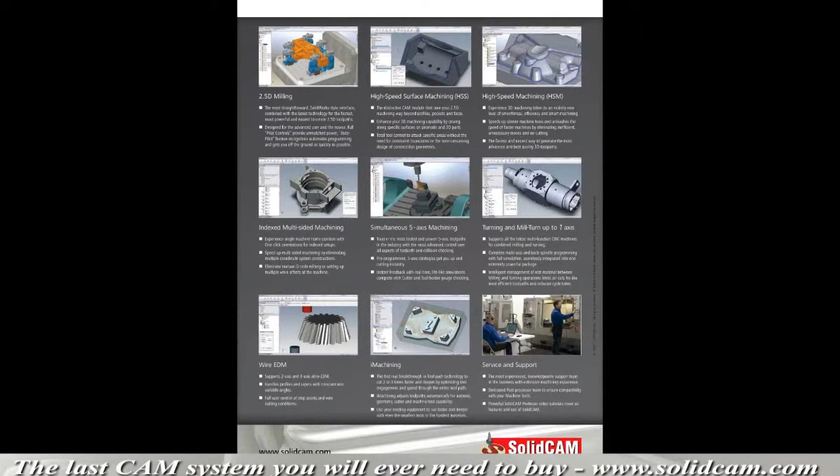SolidCAM has the packages to go right alongside your business. Add a new machine, SolidCAM will program it. Need to cut in more axes, SolidCAM can do it. You simply won't outgrow SolidCAM. It will be the last CAM package you'll ever need to buy. Now let's briefly look at the packages in more detail.

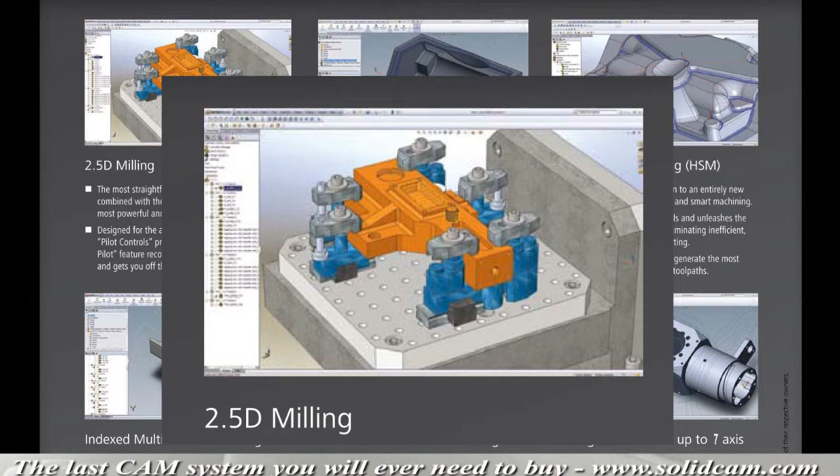2.5D milling. SolidCAM has the most straightforward SolidWorks style interface combined with the latest technology for the fastest, most powerful, and easiest to create 2.5D toolpaths. SolidCAM was designed for the advanced user and the novice. There are full pilot controls that provide unmatched power, and even autopilot feature recognition that automates the programming and gets you off the ground as quickly as possible.

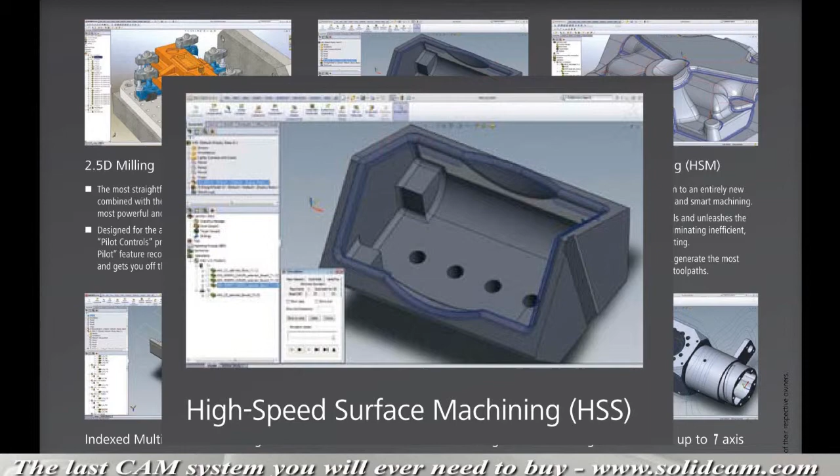HSS high-speed surface machining. This distinctive CAM module takes your 2.5D machining way beyond profiles, pockets, and faces. It enhances your 3D machining capability by driving along specific surfaces on prismatic and 3D parts, with total tool control to attack specific areas without the need for constraint boundaries or the time-consuming design of construction geometries. Perfect for doing undercuts and using shaped tools.

HSM high-speed machining, the new level in 3D milling. Experience 3D machining taken to an entirely new level of smoothness, efficiency, and smart machining. HSM speeds up slower machine tools and unleashes the speed of faster machines by eliminating inefficient, unnecessary moves and air cutting. This is the fastest and easiest way to generate the most advanced and best quality 3D toolpaths in the business.

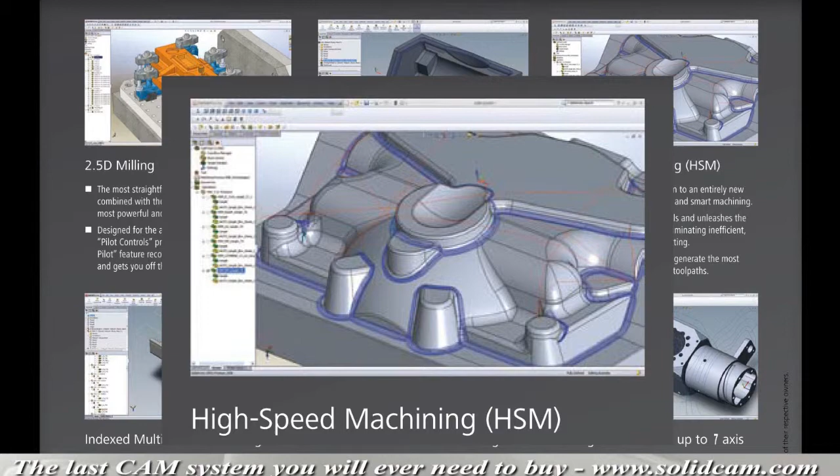Indexed multi-sided machining. Experience single machine home position with one-click orientation for index setups. Speed up multi-sided machining by eliminating multiple coordinate system constructions, and eliminate manual G-code editing or setting up multiple work offsets at the machine.

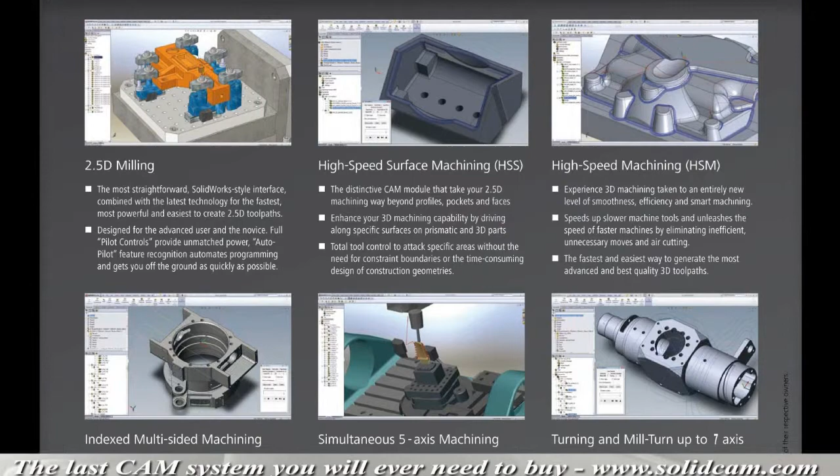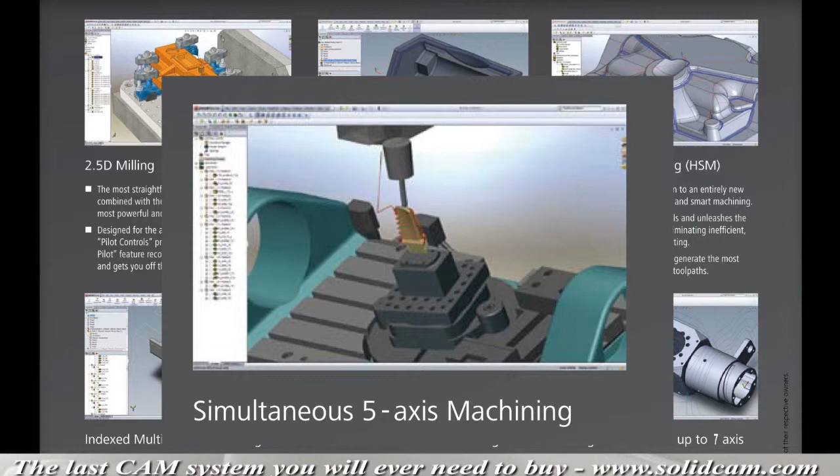Simultaneous 5-axis machining. Trust in the most tested and proven 5-axis toolpaths in the industry with the most advanced control over all aspects of toolpath and collision checking, complete with pre-programmed 5-axis strategies to get you up and cutting instantly. The 5-axis package provides instant feedback with real-time, lifelike simulations, complete with cutter and tool holder gouge checking.

Turning and mill turn up to 7-axis. Providing an outstanding solution to the hottest growing segment in the machining market, our turning and mill turn package supports all the latest multifunction CNC machines for combined milling and turning.

We have complete multi-axis and back spindle programming with full simulation, seamlessly integrated into one extremely powerful package. SolidCAM features intelligent management of rest material between milling and turning operation that limits air cuts for the most efficient tool paths and reduced cycle times.

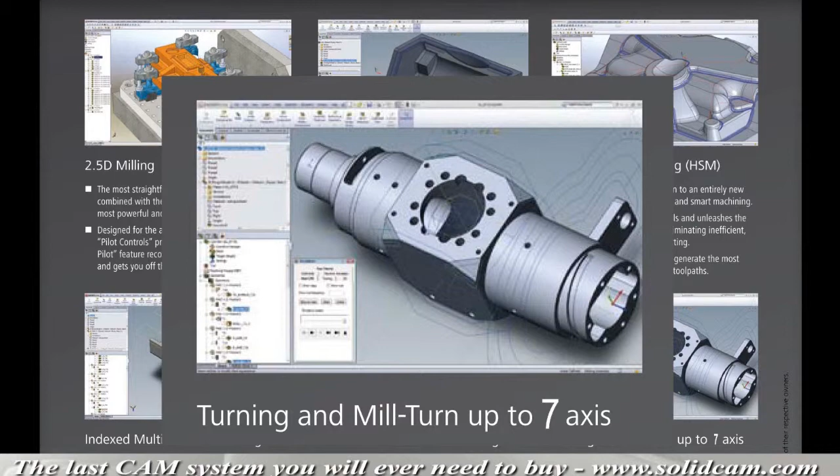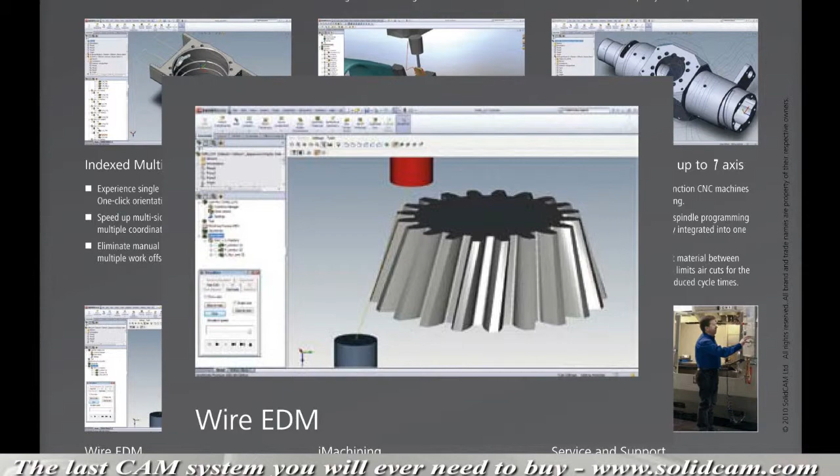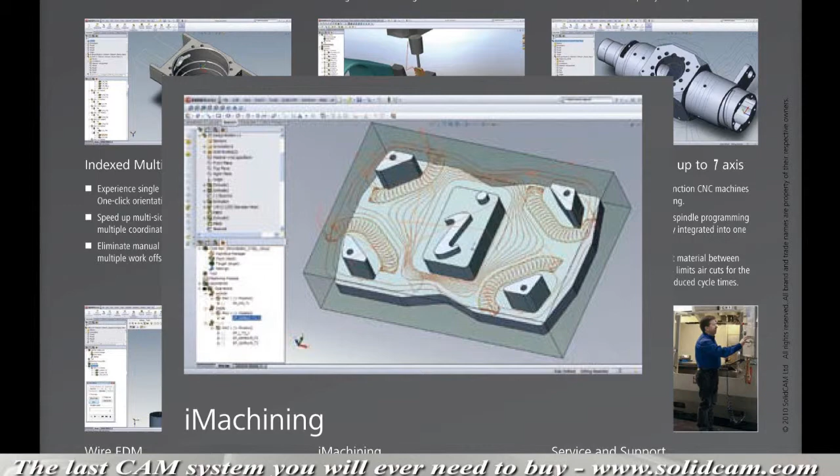iMachining. The first real breakthrough in toolpath technology that cuts 2 to 3 times faster and deeper by optimizing tool engagement and speed through the entire toolpath. iMachining adjusts toolpaths automatically for material geometry, cutter, and machine tool capability. Use your existing equipment to run faster and deeper with even the smallest tools in the hardest materials. Unlike other systems that leave you guessing at speeds and feeds, iMachining even has a speeds and feeds wizard with 50 years of machining intelligence that speeds you through the entire iMachining process.

SolidCAM has achieved the coveted Certified Gold Partner Product Certification. Unlike other CAM systems that just sort of work with SolidWorks files, we've been a Gold Partner for nearly 10 years, which is the highest level of integration possible. We were one of the first ever CAM partners with SolidWorks. You simply won't find a deeper or higher level integration than SolidCAM for SolidWorks.

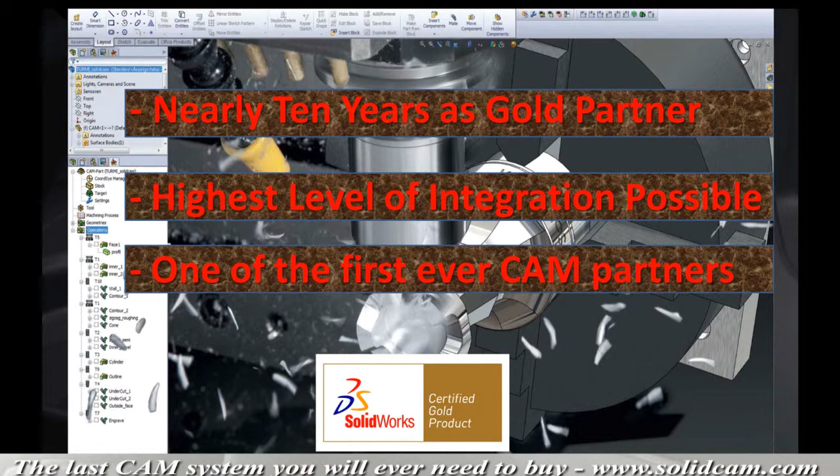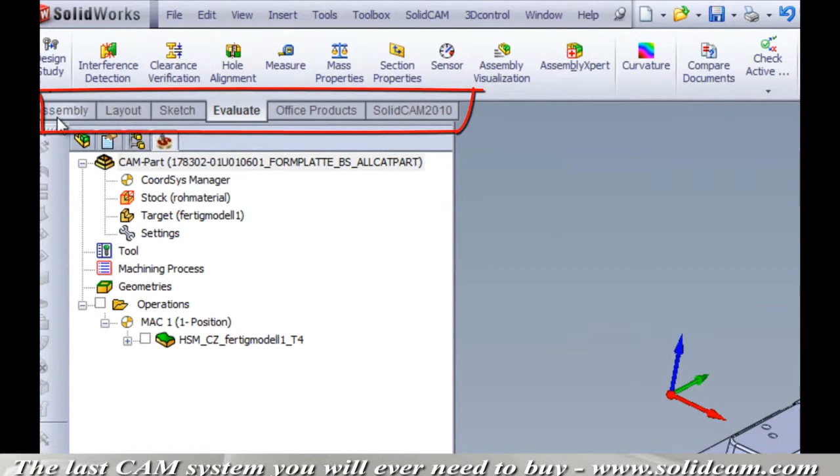One of the features that our customers say they like the most is our SolidWorks look and feel of our user interface. By running right inside SolidWorks, you can see the SolidCAM menu. It feels just like SolidWorks, so you're never having to use an unfamiliar user interface to do your CAM. We've even created a CAM toolbar to be at your fingertips so that you don't have to go far for your CAM function. Now, of course, your standard feature tree is still going to work for SolidWorks.

We've just incorporated our CAM manager into a very feature tree-like function. If you like, you can even use the two side by side so that you have your CAM functions as well as your traditional CAD functions at your fingertips.

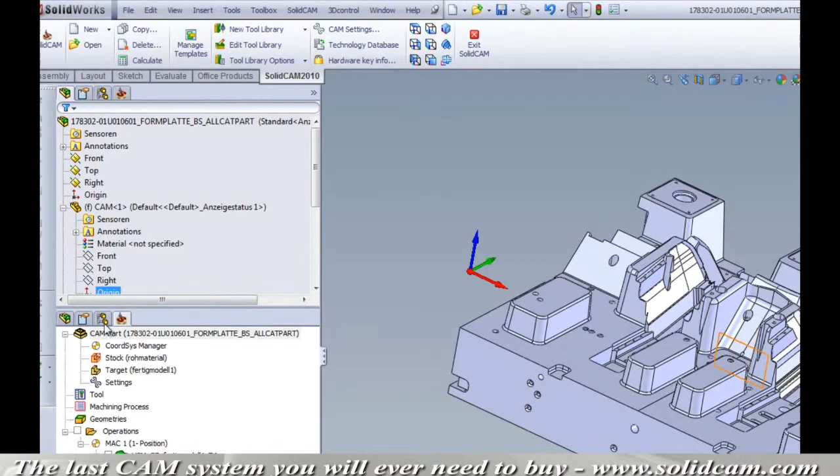Moving to our SolidWorks help menu, you'll see the SolidCAM help menu is in exactly the same place as SolidWorks help, with help topics, getting started guides, videos, and everything you need to get up to speed as quickly as possible in SolidCAM.

Here we're going to show you one of the strongest features in SolidCAM. When you have a program part, as you see here, the pockets are already set with toolpaths and the holes are as well. The system will automatically update those toolpaths when changes are made to the design model.

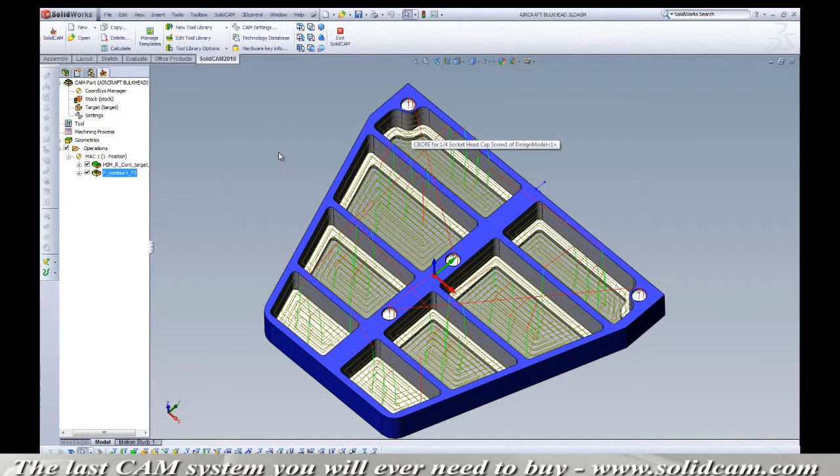Here, we're stretching a part which will obsolete every single toolpath for the pockets as well as the holes. We're going to show you now the existing toolpaths and how they're going to be completely out of sequence with the actual part.

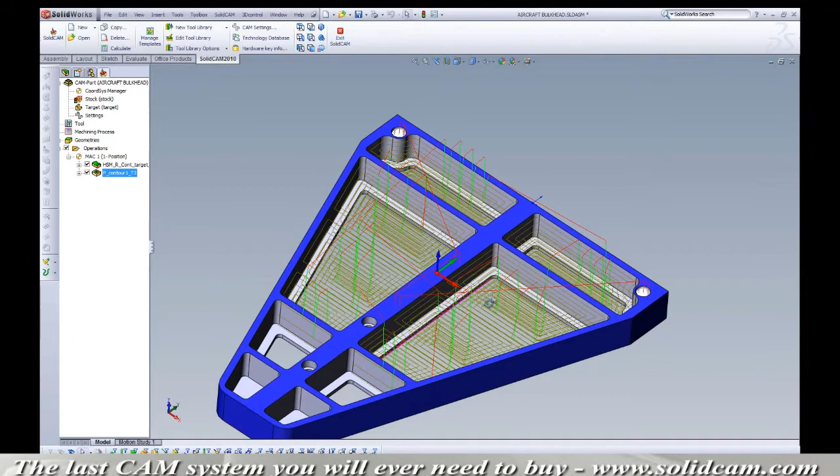Now we're going to go ahead and go on to our CAM Manager. We're going to synchronize the part to update those toolpaths. We're going to let the program automatically regenerate those toolpaths.

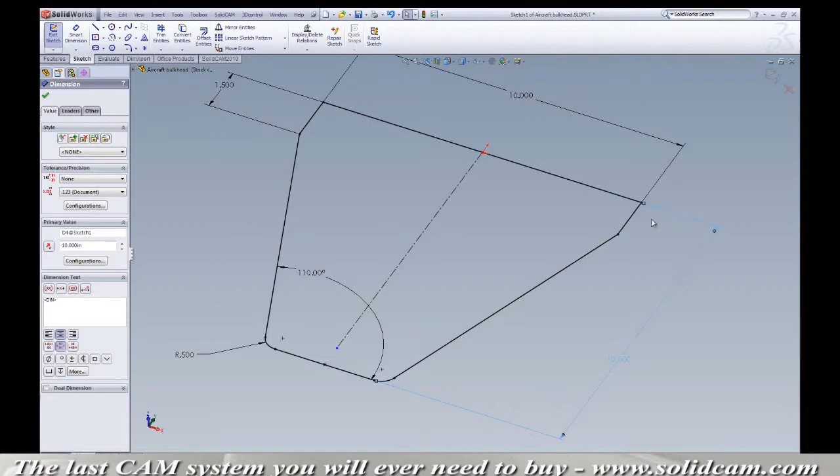So what about parts that were edited by someone outside of the CAM team? Say a design department person calls up a file like this and makes the same changes just like we did before. They stretch that part, and it has every single toolpath completely out of sequence with that part. SolidCAM is smart enough to know when that part has been changed, and when you open it the next time, it will tell you that it has been changed, even across a network, so you can choose whether or not to have that part update.

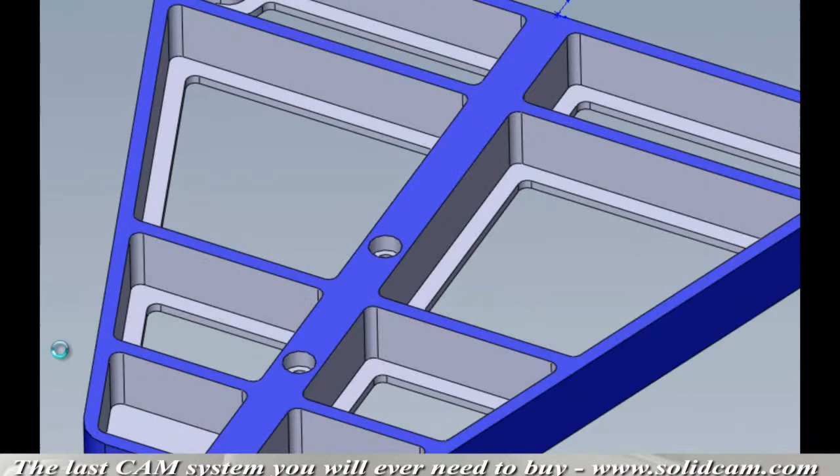Once that part is in, all you have to do is resynchronize as before, and those toolpaths will update.

Another feature that you will never get with a standalone system that is not integrated in SolidWorks is the ability to use your SolidWorks sketches to actually define your geometry.

Here, we're going to define our geometry directly from the SolidWorks feature tree by picking the sketch. Imagine if you had hundreds of pockets in that sketch. You can pick the sketch instead of spending an enormous amount of time trying to pick those pockets directly from the screen one by one. So here we show that all the chains have been formed directly from the sketch.

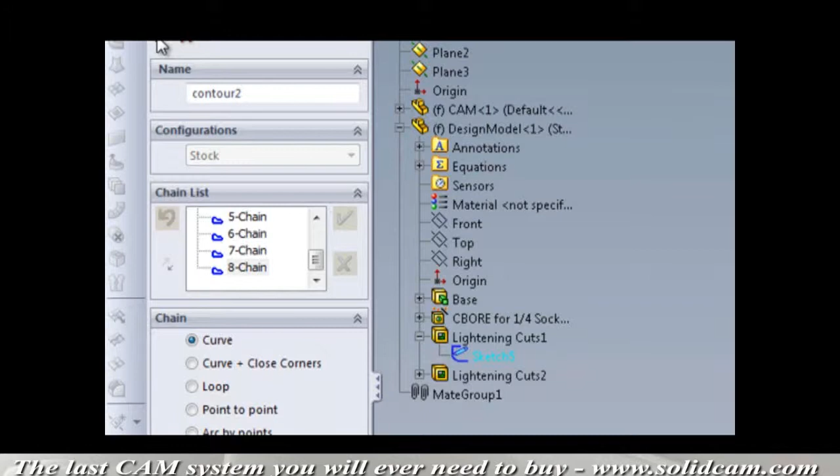At this point, we'll show you a simulation of the toolpaths. And we'll show you another simulation that goes beyond just a simple toolpath to a solid model simulation, where you can actually see the cuts in the stock.

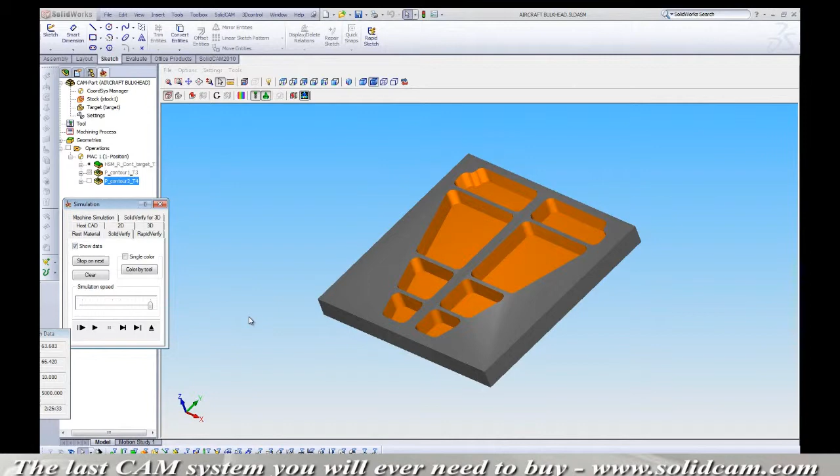Now those roughing cuts were made with a fairly large tool, which leaves the radiuses unfinished. We can use the rest material machining function to automatically go back in, use a smaller tool, and just get the material that has been left behind.

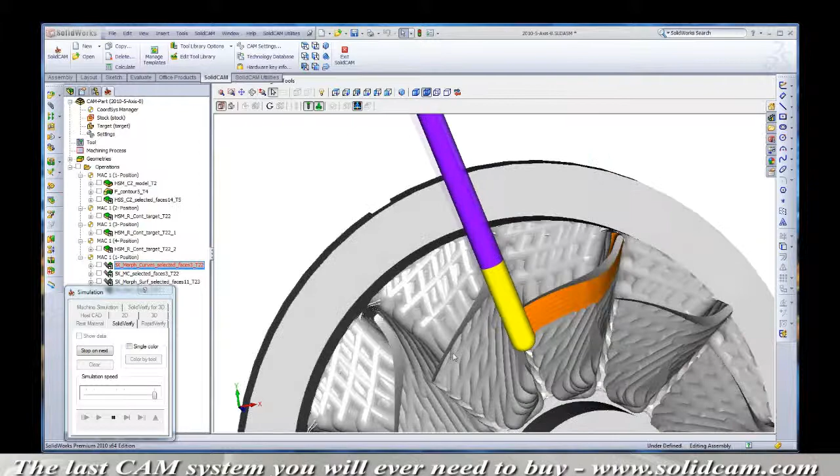Here's another example of SolidCAM's amazing simulation tools. Here we have a very complicated 5-axis part. We're using our solid verification tools to actually see the cutter going in through the part, and in the stock you can see the progress, the approach angle, and exactly how it's being cut. And of course we have full collision protection and gouge protection for this particular simulation.

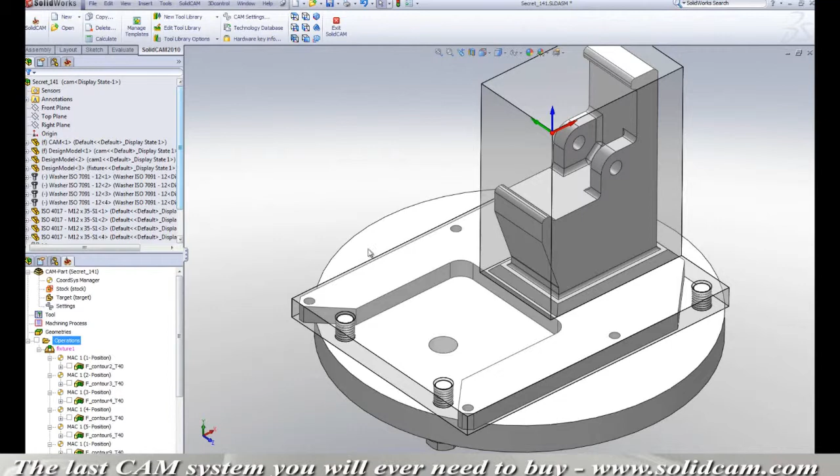Because SolidCAM works directly in the assembly modeler in SolidWorks, we can bring in the fixtures and vices and clamps that are used in combination with the part itself. In this part, we are actually going to show the simulation and how we can include the actual fixture in the simulation so you can see exactly how it's going to run on your machine.

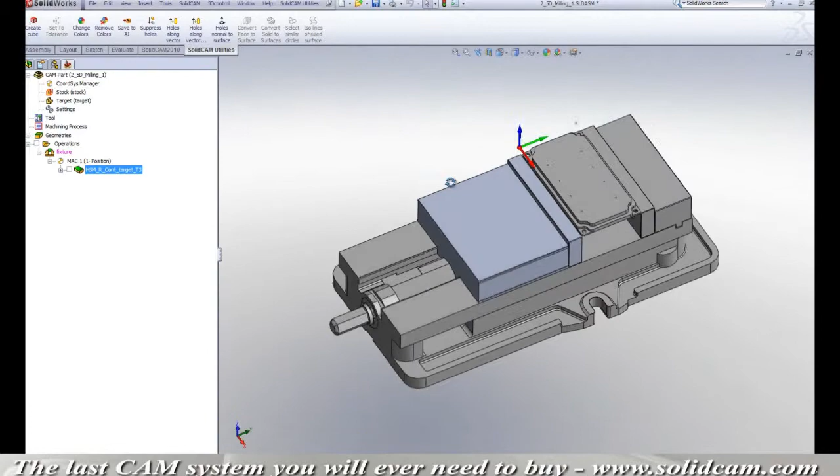For this example, we brought in a common vise to use in conjunction with this simple part. We can actually designate specific parts as fixtures so they will not be included in the SolidCAM toolpath and will be avoided.

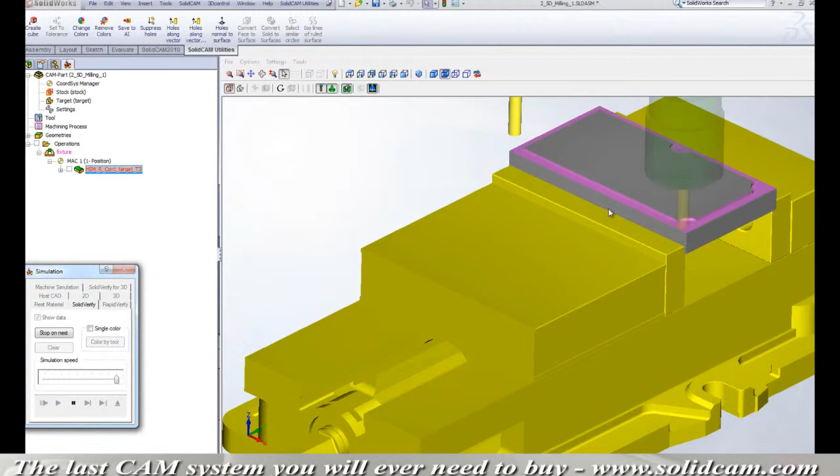Here we're showing in our solid model simulation how the cutter never makes contact with your fixture or vise as the cutter goes around and around. SolidCAM makes sure there is never any contact with any fixture being used to hold your part. As we zoom in on this upper corner, you'll see your stock being removed, and you'll see that your cutting tool never comes close to making contact.

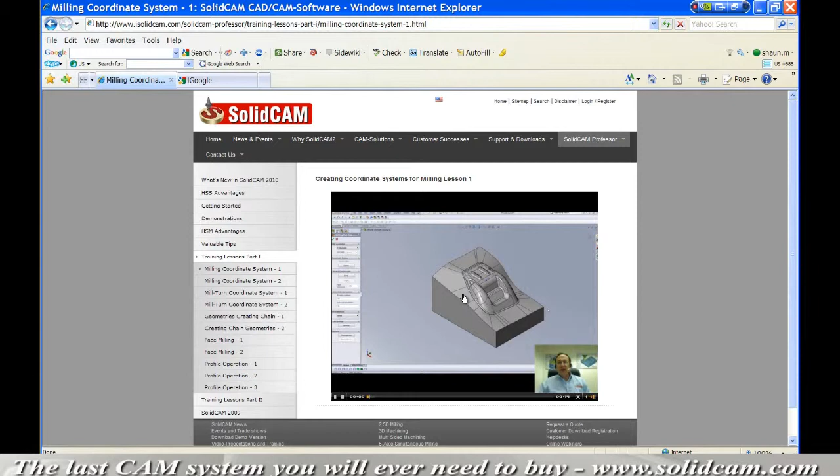Our customers often tell us that one of their major concerns is training. That's why we've created a series of tutorials available 24/7, 365 days a year, without even a password. They're available right on our website as shown. So in addition to our incredible support team that is the best in the business, you have your choice of hundreds of support videos that go step by step and cover exactly what you need so you can learn at your own pace.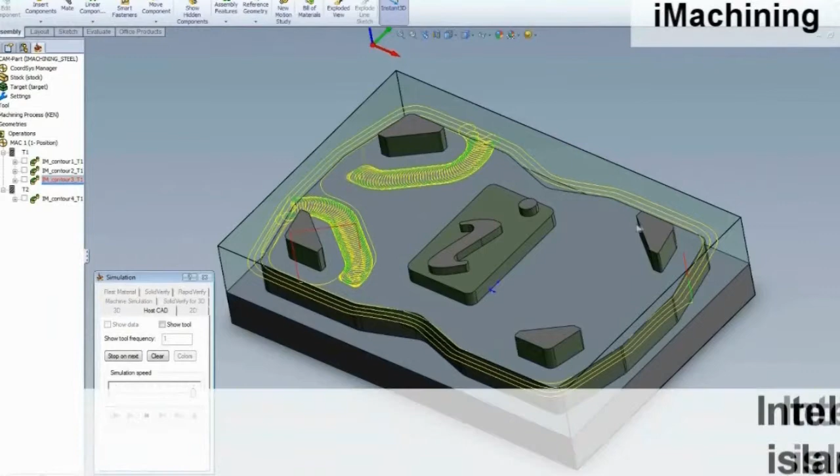With an ever-increasing demand to be faster and more efficient, iMachining gives you the tools you need to create smooth and morphing spiral tool paths that never allow your cutter to get over-engaged. This creates intelligent material removal, complete with separate strategies for islands and semi-open pockets. The results are more efficient tool paths by automatically increasing machining and programming speed, as well as cutter efficiency by as much as 2 to 3 times.

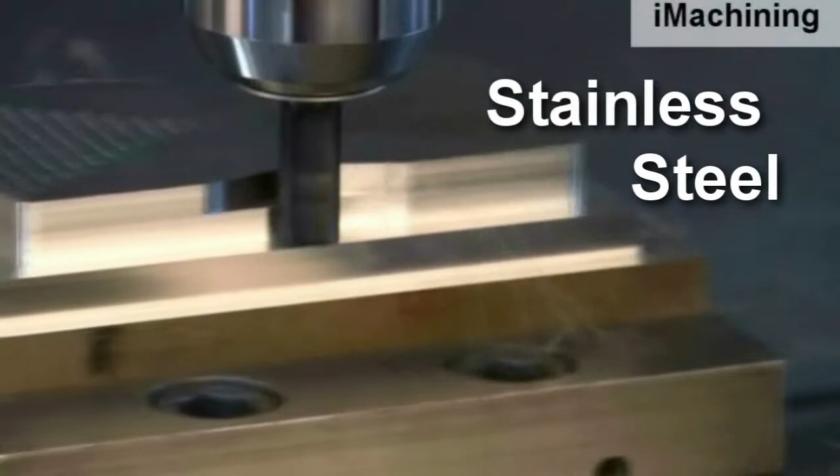Now that you have seen what we offer in SolidCAM, you can see there is no reason to use anything else but SolidCAM, integrated in SolidWorks, for all your design and manufacturing.

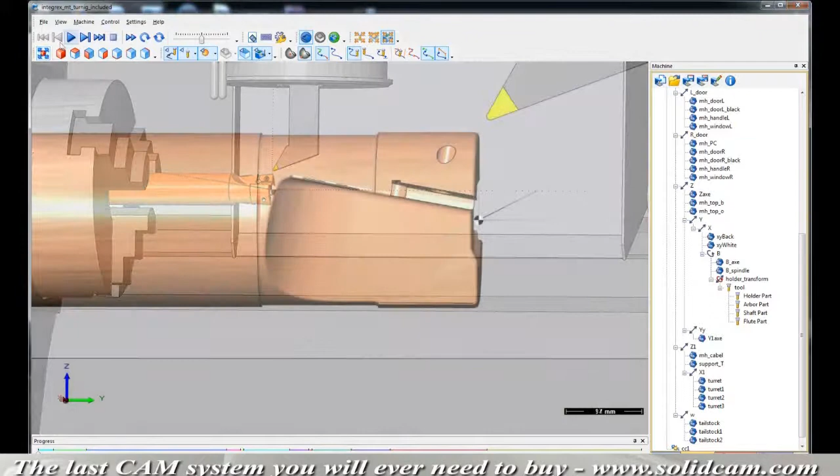One of the hottest growing segments in the machine tool market are mill turn machines. These machines combine milling and turning functions on one machine but can be extremely complicated to program. We start by zooming in and show a face cut on the turning. Then we zoom into a side cut on the turning as well. Notice the tool path is even shown during the simulation.

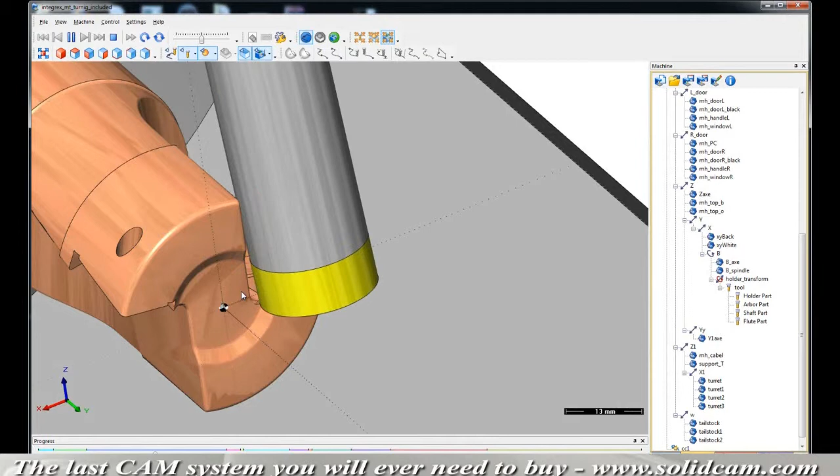As we continue, we can see the mill is now engaging the stock. The only thing missing are the actual chips flying. The machine is now performing a drilling operation.

Now we continue with simultaneous machining.

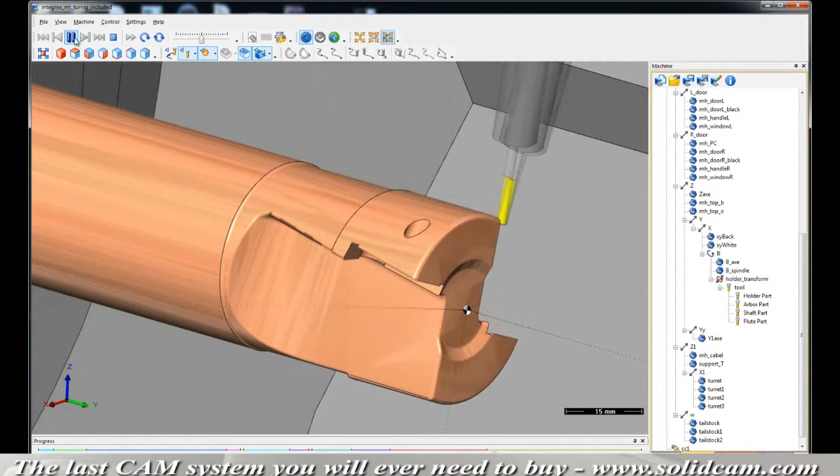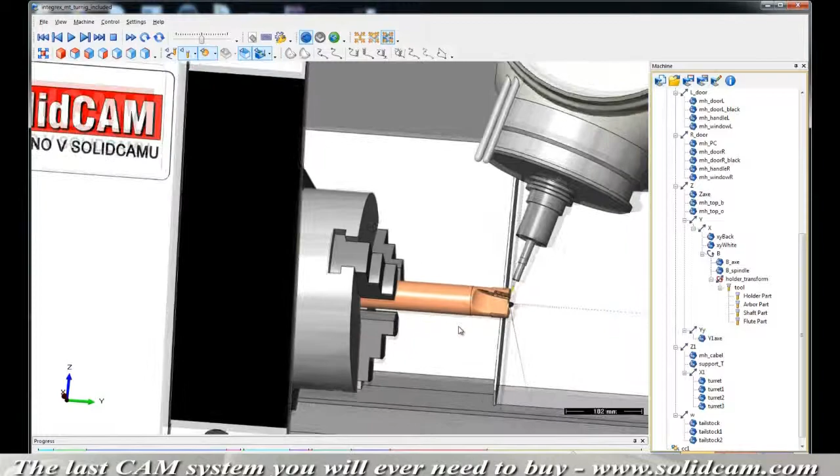SolidCAM handles mill turn machines up to 7 axes, so you never have to worry that your machine needs will outgrow SolidCAM. Here we have one of the extremely popular Mazak Integrex mill turn machines.

Another very powerful feature in SolidCAM is our feature recognition functions. Notice how you can see all the surfaces are being analyzed, with all the pockets being recognized. We will now go ahead and simulate the cutting program for those pockets that it has found.

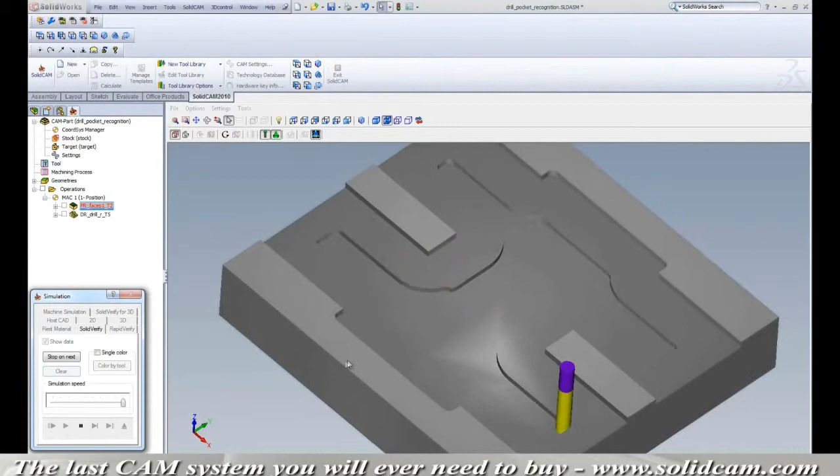We just identified all the pockets automatically, saving us a lot of time picking them off the screen or even using the individual sketches from the feature tree.

SolidCAM also has a very powerful feature recognition system for drilling that will identify all the holes on the part automatically, saving us a tremendous amount of time trying to pick them off the part. We can have SolidCAM go through the entire part and immediately identify each hole for drilling. Notice how each hole highlights as we select it from the list.

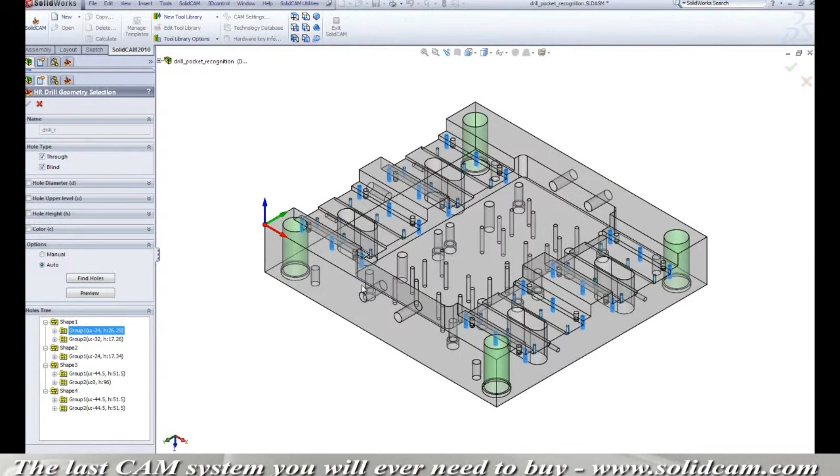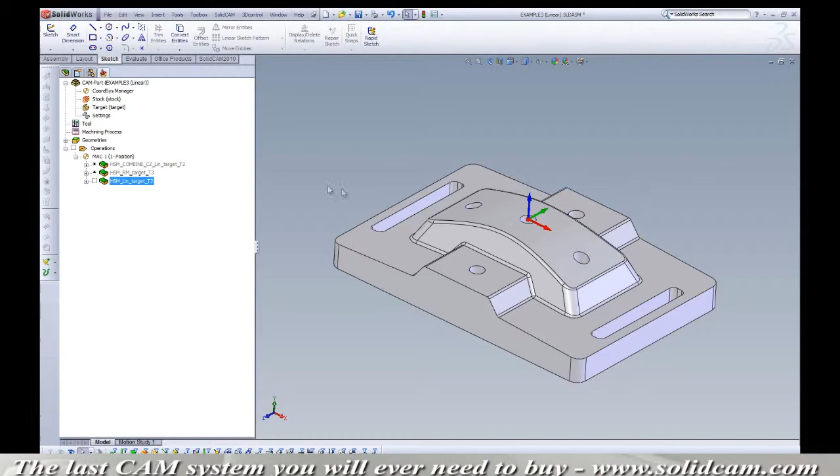The SolidCAM high-speed machining module is one of the most powerful modules available today for 3D machining. It minimizes the retract distance and makes sure that the toolpath is as close to the model as possible at all times. So here we're showing the incredible features available in the HSM module, far beyond that of a standard 3D machining module.

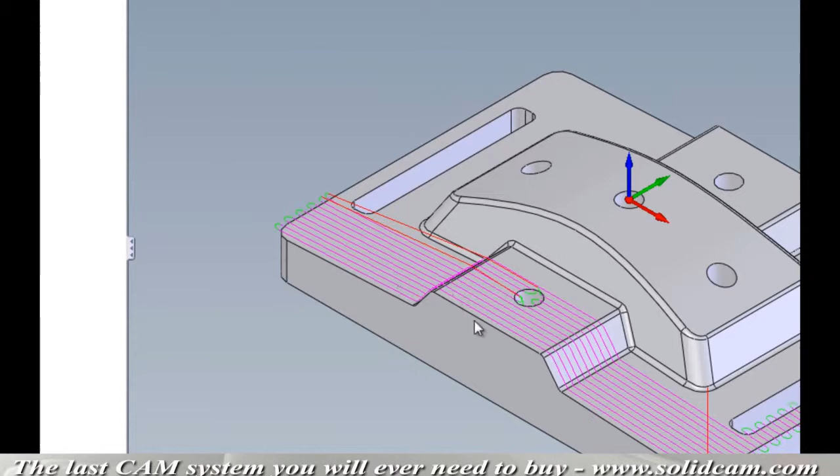Notice in our wireframe simulation how the toolpaths will actually hug the part, and the retracts and repositions will be as close to the part as possible. See how this reposition follows the contour of the part instead of going back to a retract plane. This saves a lot of wear and tear on the machine as well as definitely reduces the cycle time.

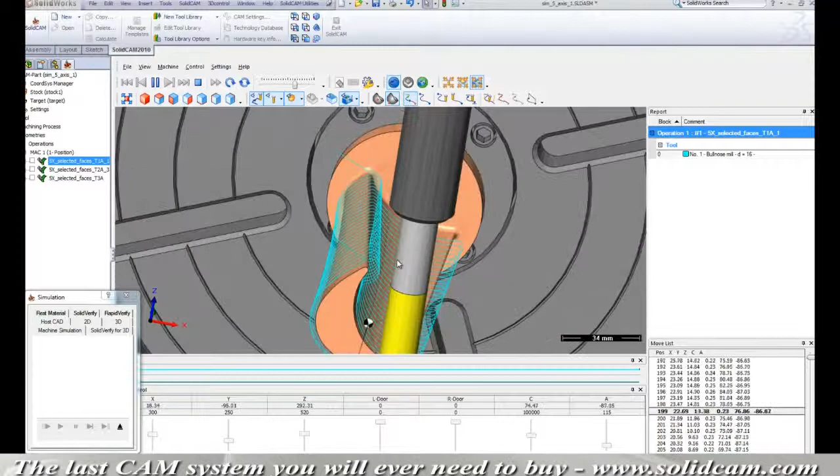For super expensive 5-axis machines, knowing exactly what your machine is doing at a given time is critical. As we zoom in, you can see that we can control the individual axis of rotation to ensure there is no obstruction or conflict between the machine cutter or the part.

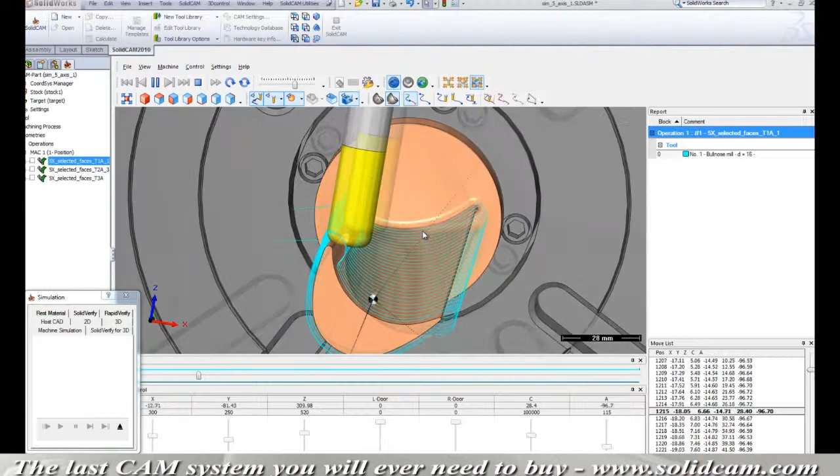You can really see the cutter in action. You can see the contour, the approach angle, and the movements it has to make as it gets in through each part of its tool path. Watching your machine cut with your stock and your tooling ensures that you won't have any time-wasting and expensive crashes later on.